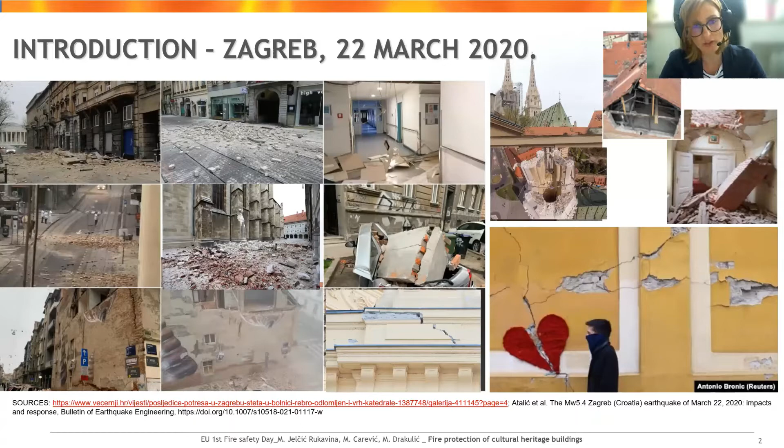Among the cultural heritage buildings, the highest damage was sustained by centuries-old churches, 30 of them categorized as cultural heritage monuments. Besides, most of the Croatian health facility buildings date from the late 19th to early 20th century, and around 80% of those buildings were built before the introduction of seismic consideration into the building code. Most of them are masonry structures built before the 1960s without any reinforced concrete elements. Those buildings are either located in the cultural heritage protected area, or they are individually protected as cultural heritage, and most of them need to be completely retrofitted.

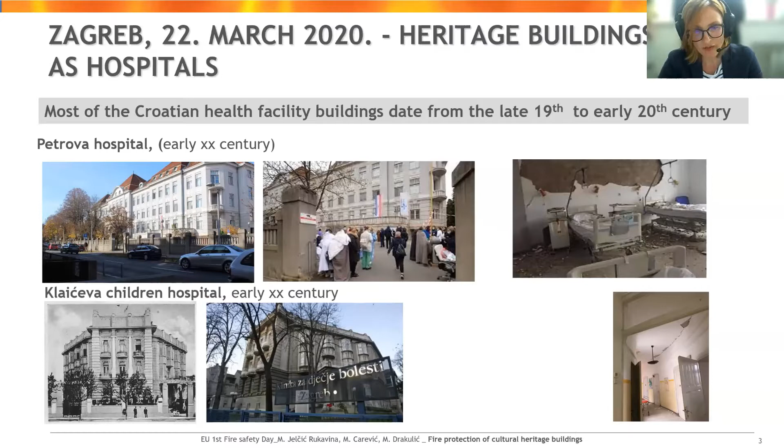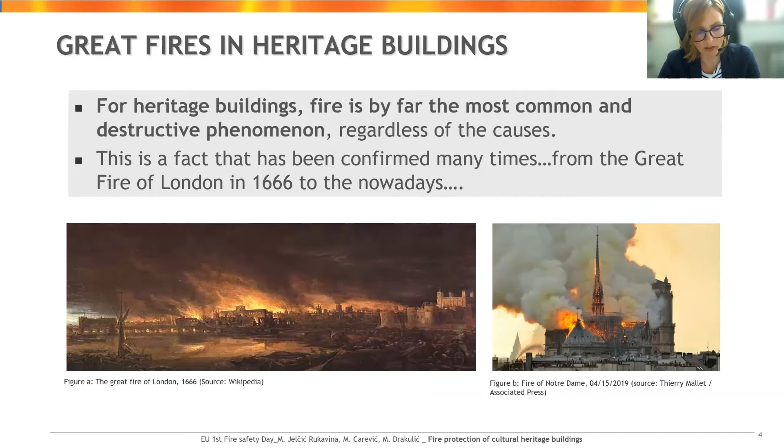Therefore, this was the reason why this important topic for Zagreb was chosen to be highlighted in brief in just 15 minutes today, as a kind of intermezzo between lectures dealing with hospital fires. Although you saw photos of buildings damaged by the earthquake, for heritage buildings, fire is by far the most common and destructive phenomenon, regardless of its causes. Many great fires in the past and in recent history prove that, like the London fire, the Notre Dame fire two years ago, or the fire in the National Museum in Brazil.

This fire was declared a national disaster, destroying hundreds of years of collected evidence of Brazilian and South American history. Many items that were burned or damaged are irreplaceable, and there is no way to determine the monetary value of such a loss. There is also one example of a hospital in a heritage building, the Royal Marsden Hospital, famous as the first hospital in the world dedicated to the study and treatment of cancer. It was hit by fire in 2008, but thanks to well-trained evacuation management, all patients were evacuated in 28 minutes, although significant material loss happened.

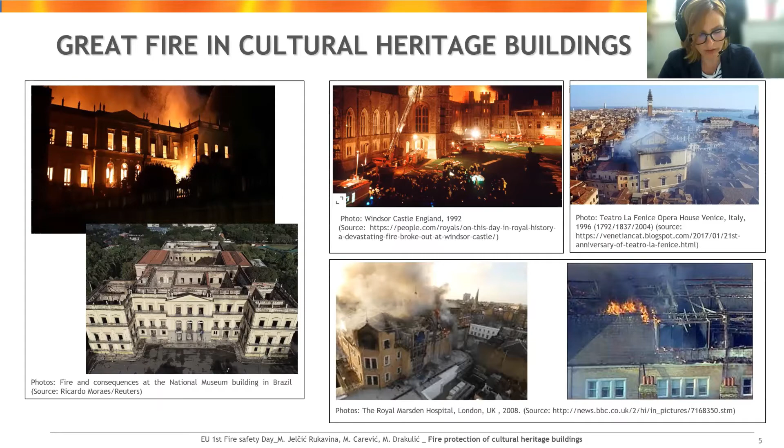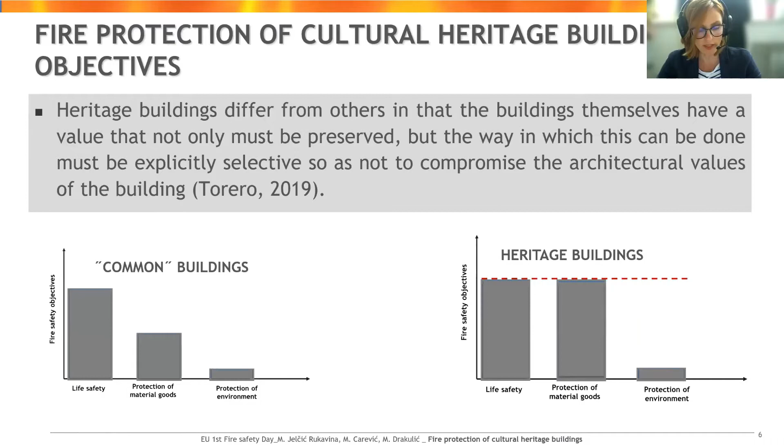Generally, when we talk about historical heritage buildings, what was perceived as safe in the past may not be perceived as safe today. One implication is that compliance means safe, and that any building that is not compliant with current, mostly prescriptive requirements is unsafe and needs to be retrofitted. In contrast to conventional code-compliant buildings, where life safety is the primary and in most cases single goal of compliance, in heritage buildings other objectives are usually of equivalent importance. Safety of life is still the primary goal, but the safety of the building and its contents requires development of specific non-invasive strategies that do not harm the value of the monument and provide safety in case of fire. This makes provision of fire safety in these buildings a rather complex task.

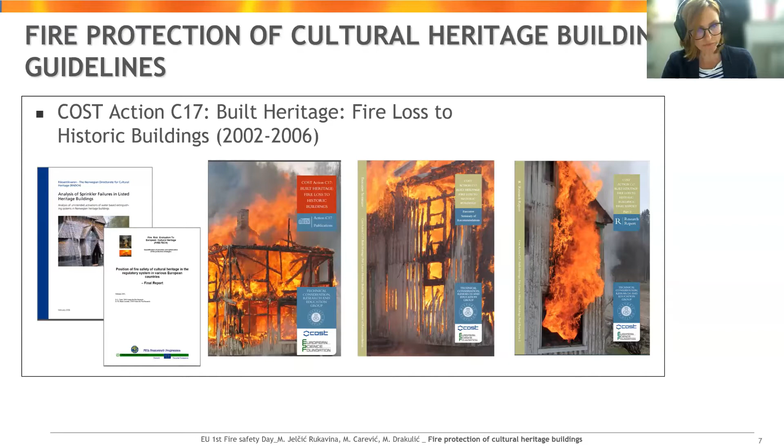Obviously, the approach to protect historic buildings from fire is different from other types of building, and the question arises how to use and retrofit cultural heritage buildings, taking into account today's fire safety issues. Therefore, from 2002 to 2006, there was European COST Action C17, whose intention was to investigate all these losses and to propose the measures needed. During the project, many publicly open documents dealing with this topic were issued. These are just some of them, but others can be found on the website of this COST action.

Nowadays, the Confederation of Fire Protection Associations in Europe has issued a guideline at European level based on the results of the above COST action, which deals with historic heritage buildings and has the content shown on this part of the slide. Due to limited time, unfortunately, I can't go through it. But I have to emphasize that this document was proposed by the Slovenian National Fire Protection Association, whose representatives are with us today and can say more about it.

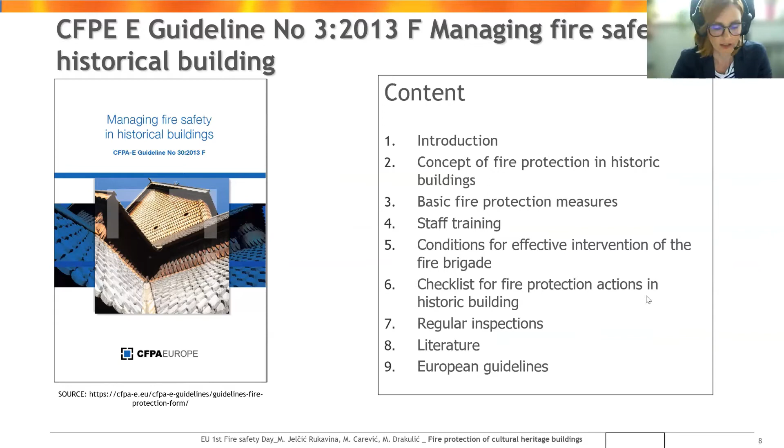Now I will say something about the NFPA Code for Protection of Historical Buildings, because the basis for that is to preserve the original qualities or character of a building structure, site, or environment. And this code

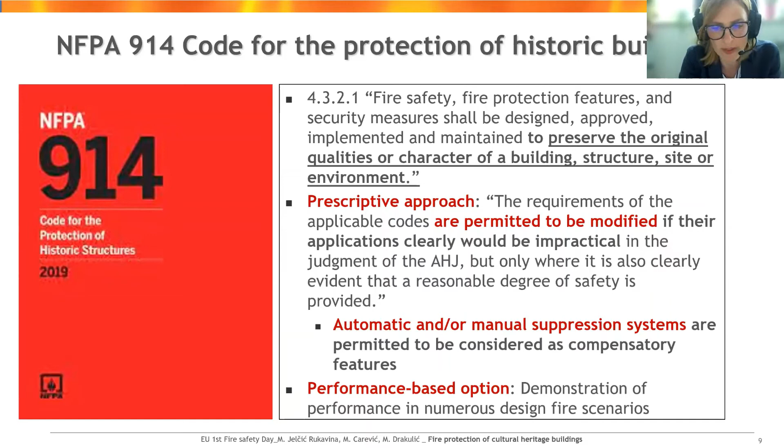requires two approaches. One is a prescriptive approach, but these approaches are permitted to be modified, and in that sense automatic or manual suppression systems are permitted to be considered as compensatory features. And the other is performance-based options, which need demonstration of performance in numerous design fire scenarios.

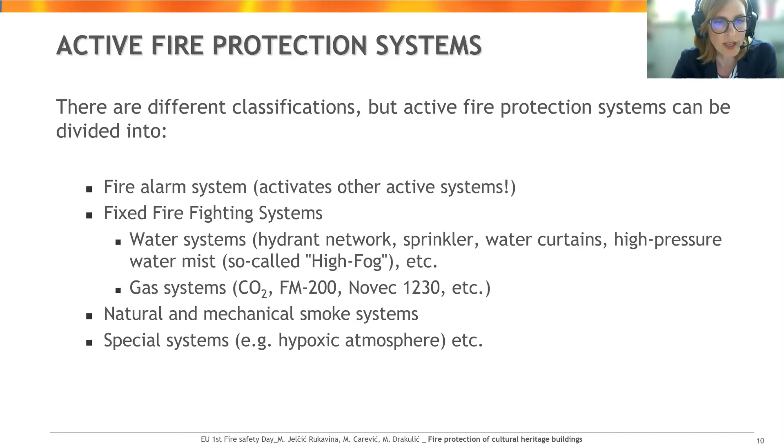Considering the first one, there are different classifications, but these are some active fire protection systems that can be applied in this cultural heritage building as well. And today, most of them have features that are hardly visible and can fit into all these buildings. These are some examples of fire alarm systems or sprinklers, walls, and so on, or automatic mist systems that are hardly visible.

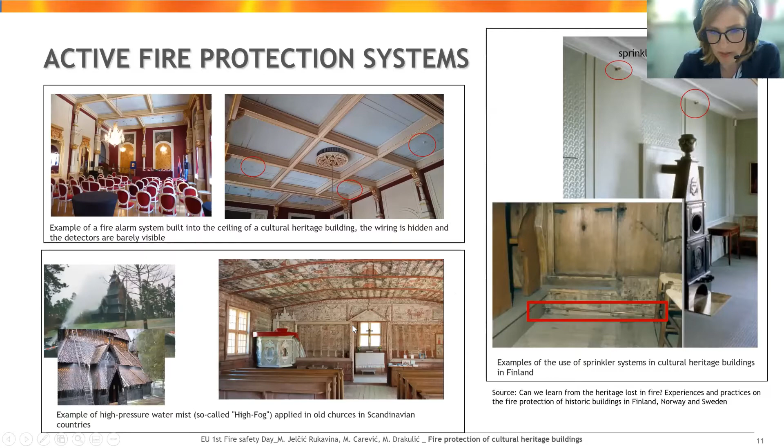Considering the second one, a performance-based approach of fire engineering, we all know, because we are dealing with fire safety engineering, what the new methods for that are. But I have to emphasize one advantage: these specific measures are based on the actual characteristics of the building and the people using it, rather than a general concept of the prescriptive approach.

And it is important because every heritage building is unique, so we can adapt the needs of fire safety to certain buildings. But the disadvantage is that this approach is multidisciplinary, and the necessary education of all stakeholders in the project design and validation process has to be obtained. Today in Croatia, we have just one place where these new methods are learned.

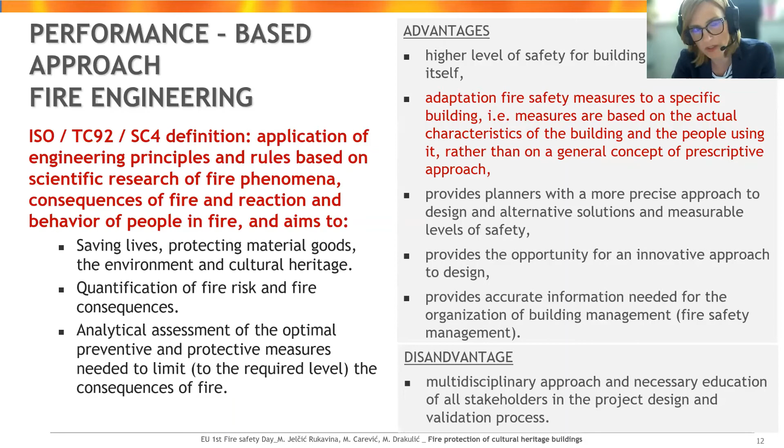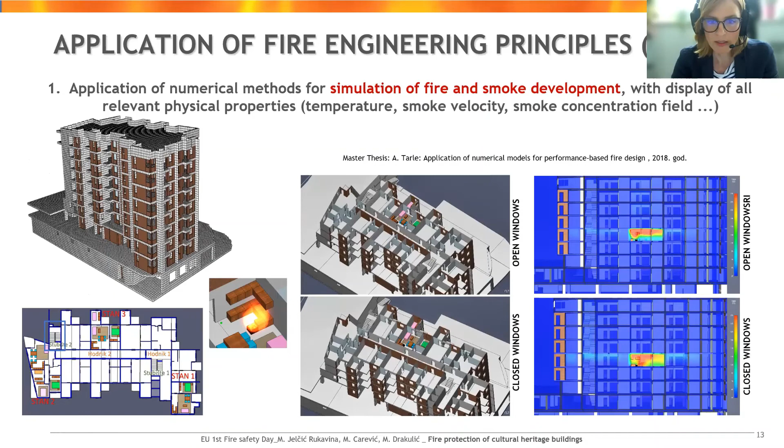So there are some examples of using this fire engineering application. In this slide, you can see a simulation of fire and smoke development in one building, where the final results are temperature, smoke velocity, smoke concentration field, and so on. The next application is that we use fire engineering principles for the calculation of the resistance and response of the structure to fire, showing the deformation of the structure.

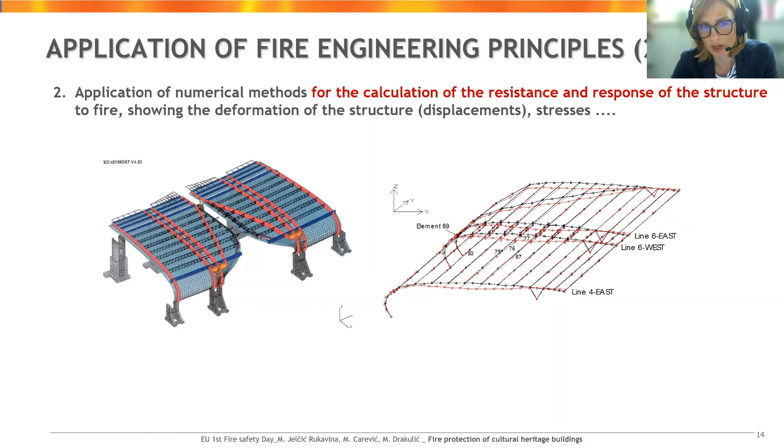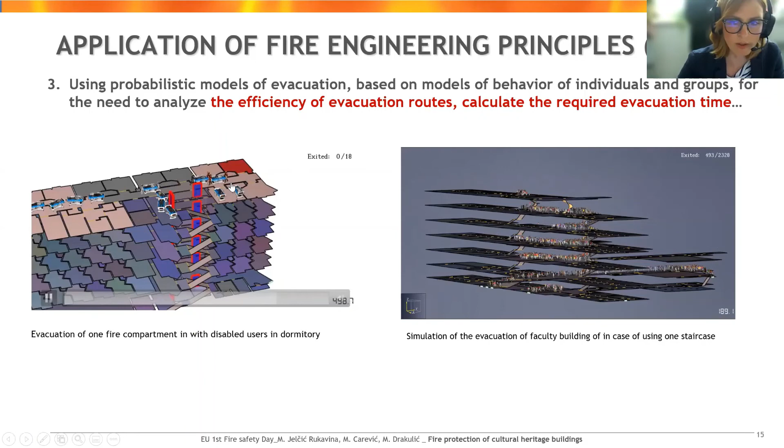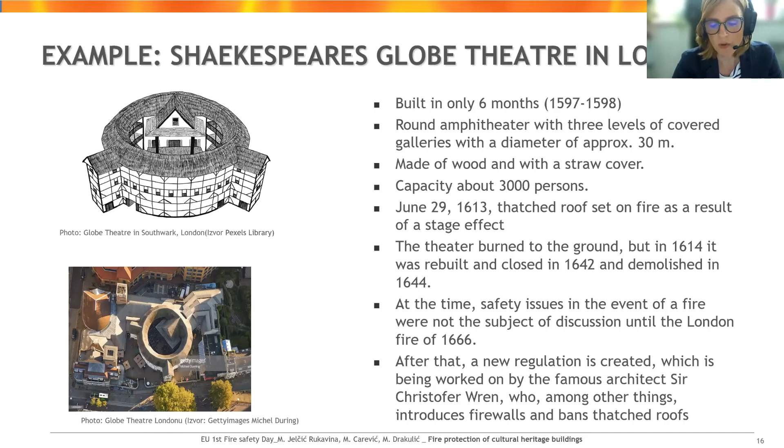And as the last part of my presentation, I will show you an example of Shakespeare's Globe Theatre in London. This, as you know, was built in the 16th century, and it was burned to the ground in the 17th century. It was originally made of wood with a straw cover, and the initial capacity was about 3,000 persons. It was renovated in 1994, but before it was renovated, extensive research was conducted to see how to renovate this theater while keeping some features, like combustible materials such as straw and timber.

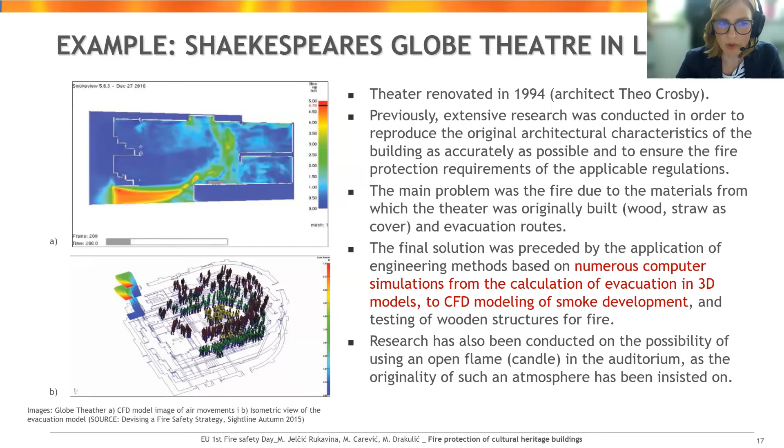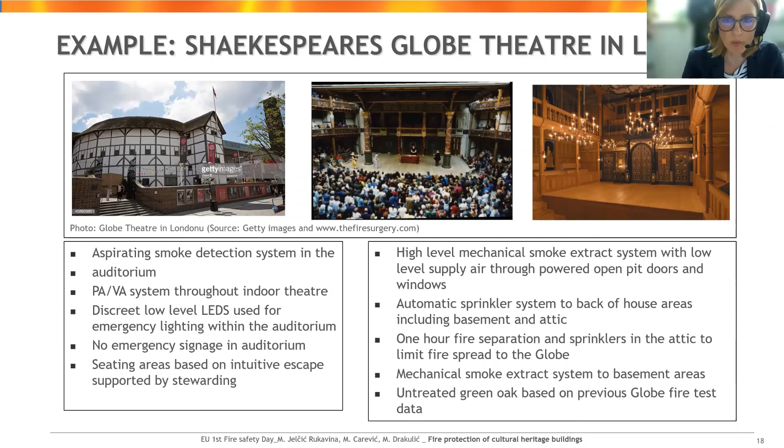So at the end, I will conclude briefly in 3 or 4 sentences I already said. In the case of heritage buildings, fire safety objectives include life safety, but must also include adequate heritage protection. For these buildings, it is important to understand that safety is not achieved by code compliance alone, and that code compliance is not synonymous with safety. Many heritage buildings have elements that make them inherently safe, although they do not comply with current codes. And good solutions for heritage buildings include analysis and application of active fire protection methods and the fire safety engineering approach.